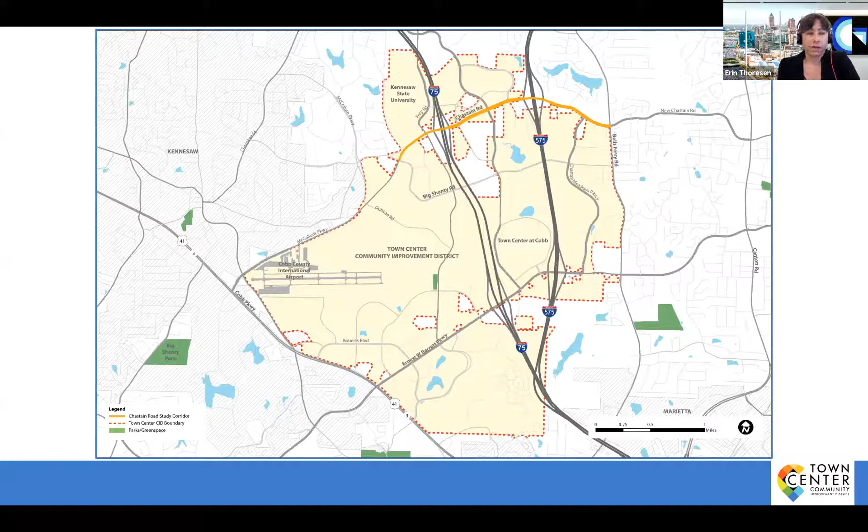The purpose of the study is to focus on walkability and creating a vibrant, walkable district, taking advantage of and leveraging smart technology for improvements to travel and mobility for all users of the corridor. We really are seeking here to link the KSU campus to Bells Ferry Road and all along Chastain Road, creating a diverse mix of office, retail, dining, and entertainment options.

So we're focused on a series of improvements that will improve conditions for biking, walking, driving, and ensuring that people feel safe and comfortable as they're doing so.

Some of the goals that we have identified throughout the course of this project, in conjunction with our stakeholder committee and based on input from community members and the Town Center CID staff, are really focused on connecting people and places. So strengthening connectivity, improving access and connections to the regional trail system, to adjacent businesses, the surrounding neighborhoods, and nearby attractions. We're also looking at improving safety and operations along the corridor.

Not just for vehicular travel, but also for people biking and walking, leveraging technology to do that, through a series of infrastructure improvements and also taking advantage of connected signal technology and other programs forthcoming to make improvements to the roadway itself.

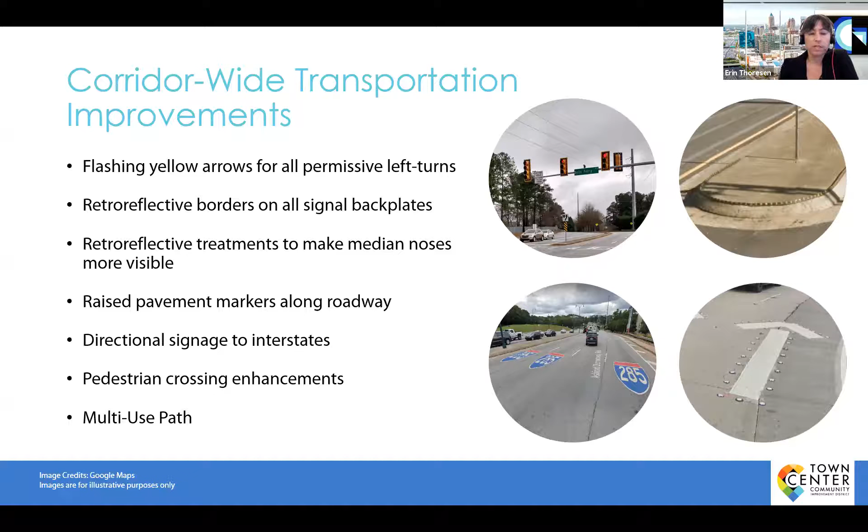Throughout the corridor, a couple of recommendations that really apply at multiple locations - at key intersections and along the main line of Chastain Road - is to implement flashing yellow arrows for permissive left turns, make sure that traffic signals have retroreflective borders on the signal backplates, improving safety by adding retroreflective treatments to the median noses and also along the roadway, as well as signage and standard pedestrian enhancements, and also development of a multi-use path.

So as you can see here, we're going to walk through a series of these, but the main thing to note is that we're proposing to repurpose the existing on-street bike lane and incorporate it into a multi-use path along both sides of Chastain Road for some segments, and one side for others. We would hold the center median in place and push out the outside curb to capture that existing bike lane and use the available public rights-of-way to create a multi-use path.

This provides a facility for people biking and walking on both sides of the road, separated from the travel lanes by the curb and a planted buffer strip, making it more comfortable for all users. The multi-use path would be bi-directional, so you can travel in either direction on either side of the road depending on your destination or origin.

This is a view of what it might look like over I-75 on the existing bridge. The multi-use path narrows a bit to fit within the existing width, but it's still able to accommodate some separation between the travel lanes and the path to make it feel more comfortable than current conditions.

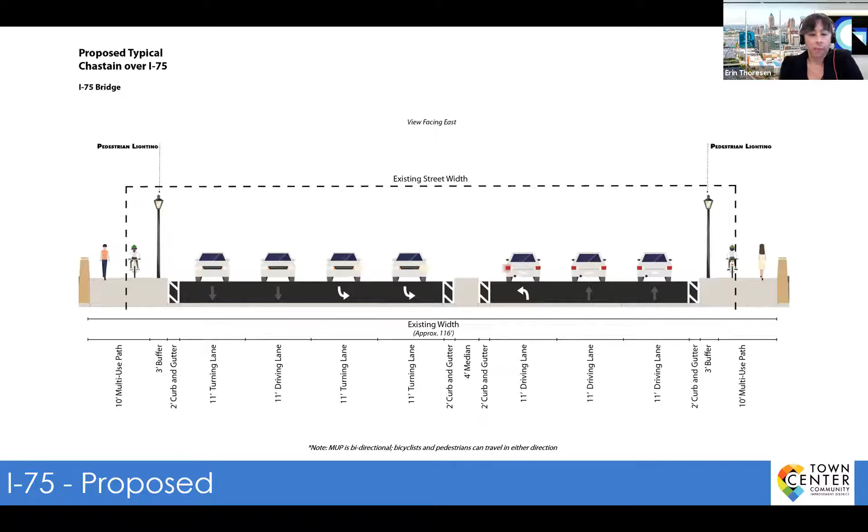Continuing eastward, we're looking at the central portion of Chastain Road. This is one of the widest segments, and the recommendation is to continue the multi-use path on both sides of the road up to the Commons at Chastain Shopping Center. You can see there's space for the planted buffer strip as well as lighting, with the multi-use path on both sides of the road.

Where the right-of-way can accommodate it, we can incorporate pedestrian amenity nodes that would provide places for people to pull off and stop, get a drink of water, check their phone, etc. We're trying to provide spaces for people to stop and rest periodically, and we could include signage for wayfinding as well.

At this point in the corridor, the multi-use path might switch to just one side of the road, along the south side of Chastain Road as you head east. This location was identified as a transition point based on connections and linkages with proposed trails, creating better connectivity to the Noonday Creek Trail and other proposed trails south of Chastain Road.

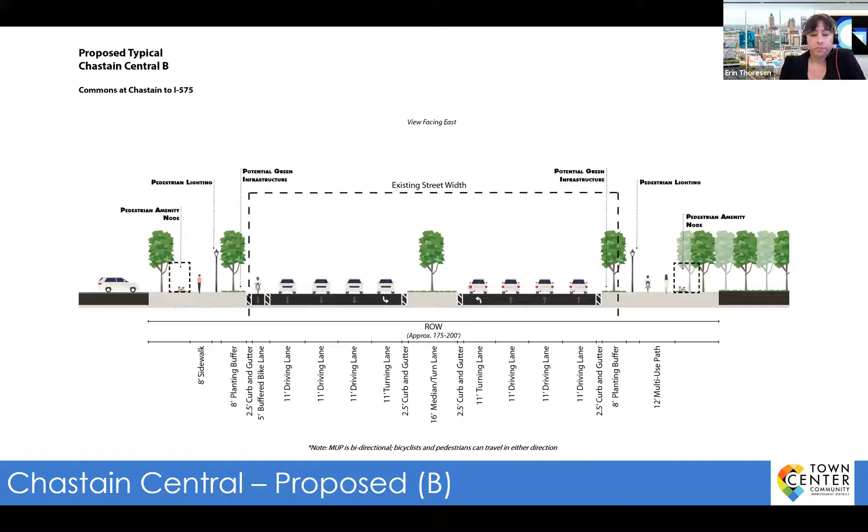Continuing eastward, we see a similar pattern with a multi-use path on the south side of the road, able to fit within the bridge over I-575, accommodating both bicycles and pedestrians. It should be noted this is just a proposed condition at this point—the exact configuration of any of these segments would depend on what improvements are advanced in the intersection improvements incorporated into these projects as they move forward.

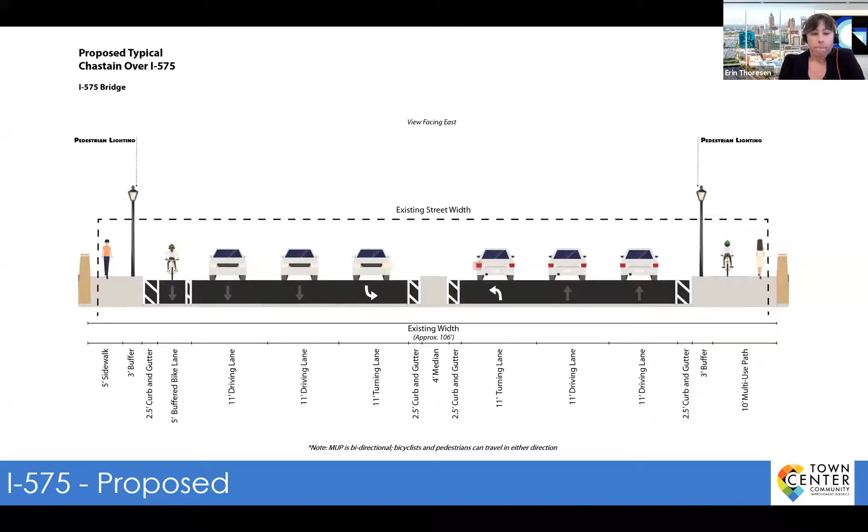In the eastern segment here on the east side of I-575, it's a very similar condition. We're proposing a buffered, separated bike lane on the north side of the road where we're not having the multi-use path, accompanied by a sidewalk, and continuing the multi-use path on the south side of the road, again with a planted buffer strip and pedestrian amenities where there's space.

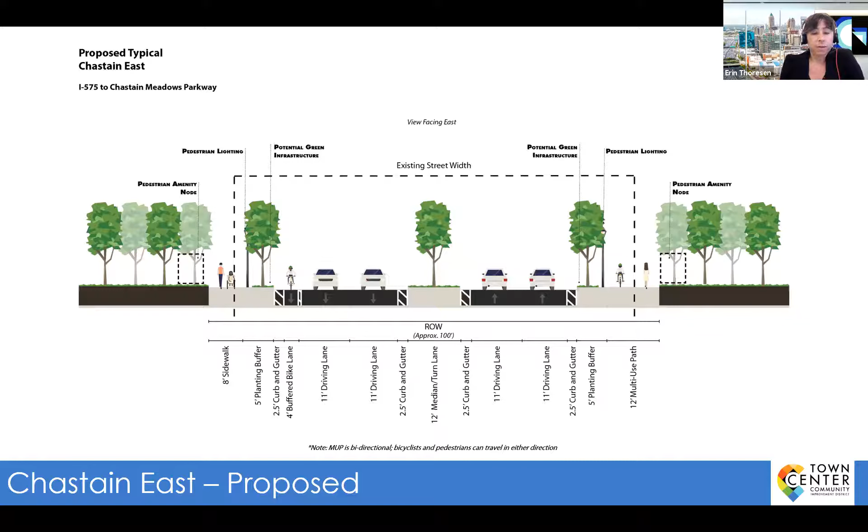Here's an aerial view of where that multi-use path is proposed. The white arrows represent some new or enhanced crossings across Chastain Road. The reason Chastain Meadows Parkway was chosen as the end point for the multi-use path is, as I said, based on connectivity.

As you can perhaps see in the dashed lines here, there are some proposed trails along Chastain Meadows Parkway and along Busbee Drive, and we have the multi-use path continuing southward in those locations. So we're really designing this to be linked up with and provide connections to those proposed other facilities.

At some point in the future, if it makes sense to revisit and consider a connection all the way to Bells Ferry Road, that's something the CID could certainly consider. Some reasons we decided to terminate at Chastain Meadows Parkway are due to topography, public rights-of-way constraints, and the limited space available in those locations. Using Chastain Meadows would also provide a direct connection down to the Noonday Creek Trail.

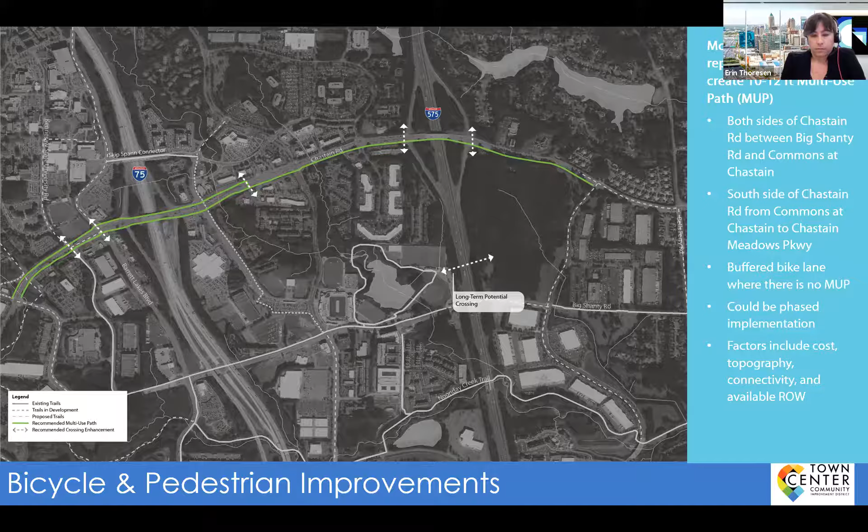As I had mentioned, we're also looking at a series of intersection improvements along the corridor. These would provide additional turn lanes, changes to signal phasing, and retrofits at some locations with a higher frequency of pedestrians crossing Chastain Road that would remove the channelized right turns. We would also look at some restricted crossing U-turns that would streamline turning movements at certain locations, eliminating left turns from side streets with downstream U-turns instead. And we'd have pedestrian facility upgrades at each of these locations, with enhancements to crosswalks as these projects move forward.

We're not going to go into the details of each of these recommendations, but there's additional material that'll be available on the CID website following today's presentation, where you can learn more about each of these improvements. But we do want to highlight just a couple for you here today.

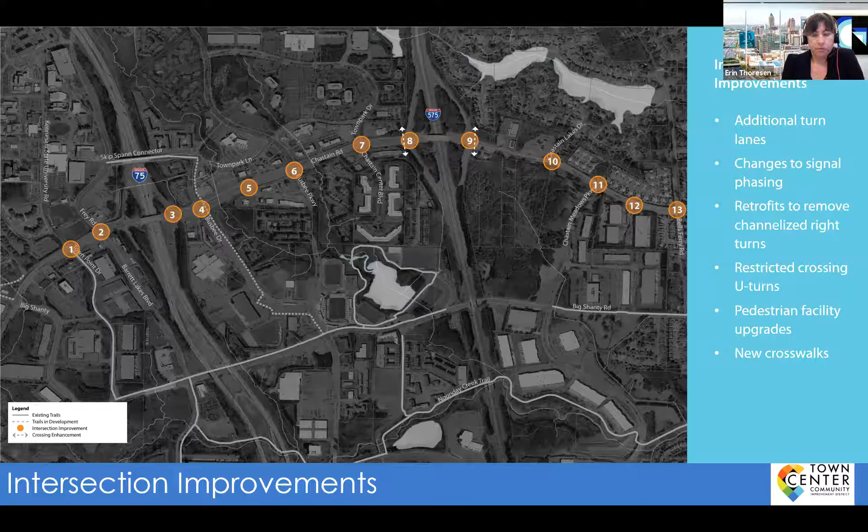One of the options we're considering is a series of improvements at the interchange with I-575. The first improvement would be an early off-ramp from southbound I-575. This would reduce traffic volume on Chastain Road in that location by diverting folks headed southbound onto this early off-ramp, which would tie into the intersection at Town Park Lane and Town Park Drive. There'd be associated intersection improvements at that location to accommodate that. By diverting those folks to the early off-ramp, you'd reduce the likelihood of weaving movements, especially for people traveling southbound on 575 who then seek to make a left turn at the next intersection.

We're also looking at providing an additional southbound lane here that would give options for people to turn left as well as right, with a center lane serving as an option lane for either turning left or right. So you'd have one dedicated left turn lane, one dedicated right turn lane, and an option lane in the middle that would allow you to turn in either direction.

Another option we're looking at for the interchange at 575 is to create a diverging diamond interchange at this location. A DDI has fewer potential conflict points than a conventional intersection, since it eliminates the need for left-turn vehicles to cross the paths of approaching through vehicles.

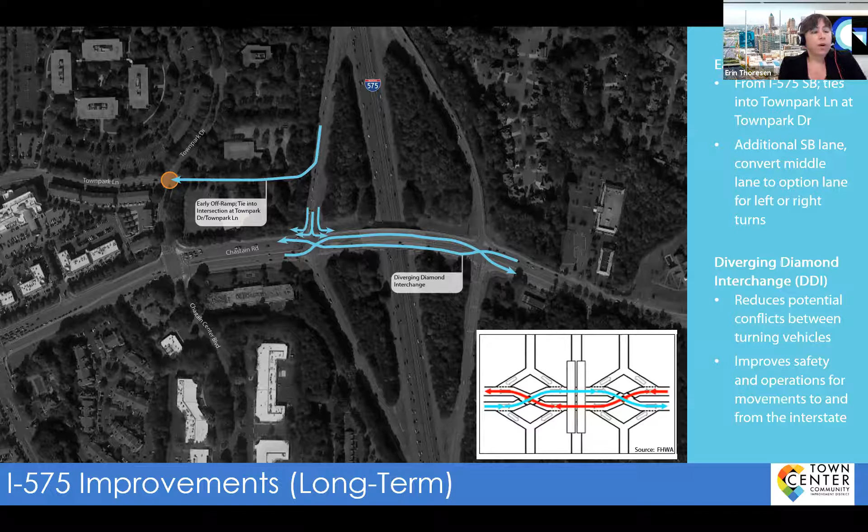Do we have other questions at this point, Alicia? Nope, no questions. Okay, we'll continue on then.

Our study, in addition to thinking about intersection improvements along Chastain Road, we're also thinking about some long-term considerations and what might help improve conditions along Chastain Road and alleviate some of the pressure it currently experiences and is likely to continue experiencing. Some of those long-term considerations include the possibility of creating a direct system-to-system interchange between I-75 and I-575 that would help take some of the pressure off of Chastain Road as well as other roads in the area that connect the two highways.

Based on our team's analysis, there are approximately 10,000 vehicles per day traveling between 75 and 575, and they're either using Chastain Road or Barrett Parkway. So that would really provide some potential relief. It's something that needs to be studied further, but it's definitely an option that we're recommending be studied in the future.

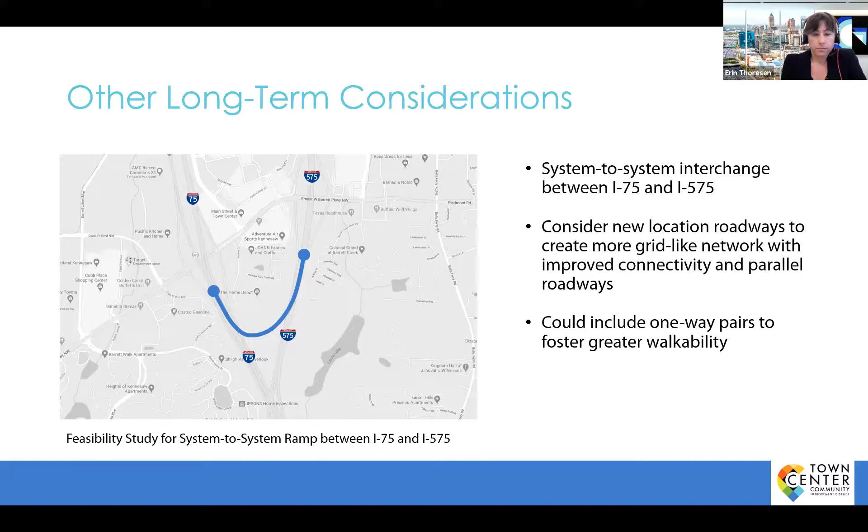So moving into the realm of technology and smart communities, we're looking at a range of different options. The team is considering ways to incorporate technology that will benefit people, whether they're biking, walking, driving, or traveling in other capacities. We looked at what technology already exists along the corridor.

Traffic signals along Chastain Road are part of Cobb County's Sydney Coordinated Adaptive Traffic System, known as SCATS, which helps the county manage real-time timing of traffic signal phases at the different intersections along the corridor. And we know that there's a regional connected vehicle program being developed and implemented by GDOT and the Atlanta Regional Commission in partnership with local governments.

Taking these factors into consideration, we wanted to see how we can best leverage that technology and what else we can recommend to complement it in order to improve operations and safety, as well as to make it easier for people to get around and help create that sense of place we're talking about creating along Chastain Road.

As I mentioned, all 13 signalized intersections along Chastain Road are going to be part of the Regional Connected Vehicle Program, that partnership between GDOT, ARC, and local governments. This program will focus on deploying dedicated short-range communications, which will target deployment of applications like emergency vehicle preemption, giving emergency vehicles priority at traffic signals, along with transit signal priority, which could help expedite transit travel along Chastain Road, or as vehicles like buses cross Chastain Road.

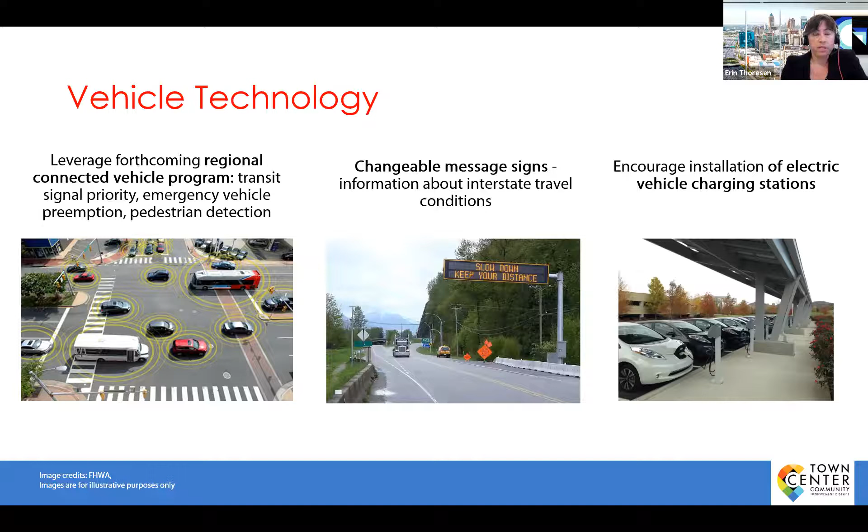In addition to vehicle technology, we're also thinking about pedestrian technology and ways it can benefit people biking or walking along the corridor. One example is the leading pedestrian interval, a Federal Highway Administration proven safety countermeasure. These help reduce the likelihood of pedestrian vehicle crashes by providing a few seconds of walk time for pedestrians before vehicles get their green signal.

What that does is put the pedestrians out into the intersection before the vehicles make their through or turning movements, so that the drivers of those cars are more likely to see the pedestrians and reduce that potential for conflict.

We're also thinking about sensors that would automatically detect pedestrians crossing side streets along Chastain Road, so that you wouldn't necessarily have to push a button to get the walk signal, as a way to again leverage technology and improve pedestrian safety.

Our team is also recommending exploring a pilot project to look at lighted crosswalks for some of those locations near KSU's campus where you have a higher likelihood of pedestrians crossing Chastain Road.

So there are several examples of these being used in other cities, and recently in the Atlanta region, the Aerotropolis Atlanta CIDs received a grant to explore something similar along Virginia Avenue.

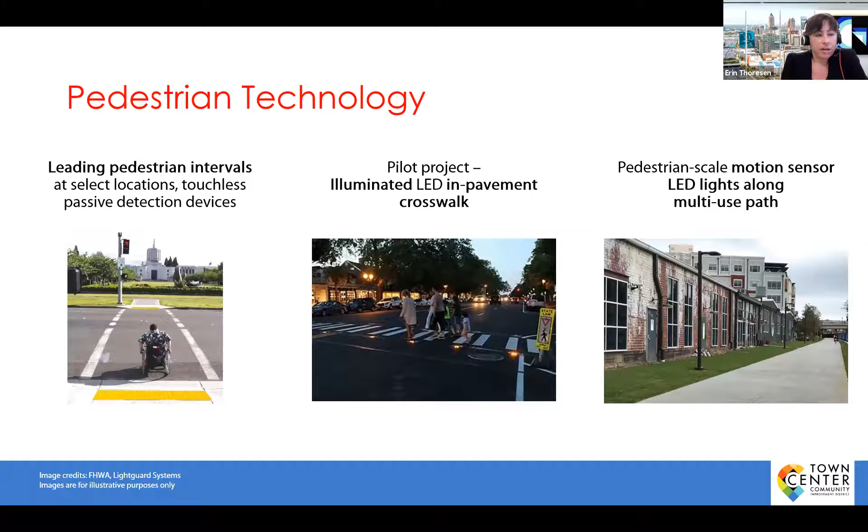So with that, we're going to continue on. We have a couple more topics to cover, and then we'll pause for some questions as we get through the next few topics. I'm going to turn it over to my colleague, Erin Hathaway, to talk about urban design and placemaking. Thanks, Erin. So we're going to walk through a series of recommendations related to public space and development that prioritizes pedestrians and active entertainment uses, really to strengthen this corridor as a destination.

It aligns with the goals that we talked about at the beginning. These include short and long-term shared public open space, amenities along the corridor to support multi-mobility like streetscapes, as well as making sure infill supports the goals of this study. Next slide, please.

So this is just a quick study to showcase what the streetscape could look like along the Chastain corridor. Now, we know that the CID has their own streetscape guidelines, and so we're incorporating those into how we see Chastain with our multi-use path. Here is just an example of how that would look.

We have the white band in the middle, which is where the multi-use path would run. The orange line is where the curb is bumped out. As explained earlier, we're basically pushing the bicycle lane up behind the curb, which gets us more space behind the curb. We've suggested and recommended that stormwater infrastructure be installed as a buffer, so that water from the street can run off into a sustainable solution for filtering that stormwater before it goes into the system.

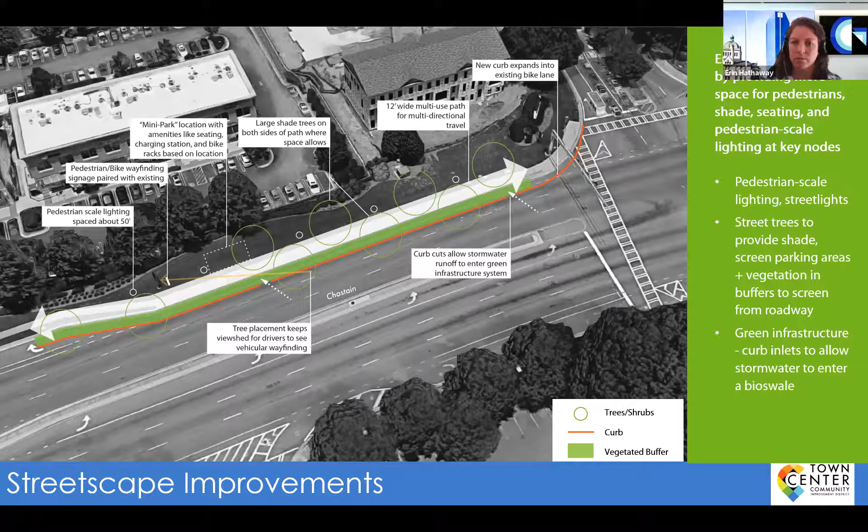These would not be ones that happen regularly, but they would be in very strategic, specific locations that could provide information to pedestrians exploring the corridor, about where live events might be happening, or letting them take advantage of different businesses having specials and whatnot. So those would be very strategic locations for the technology kiosks. Next slide, please.

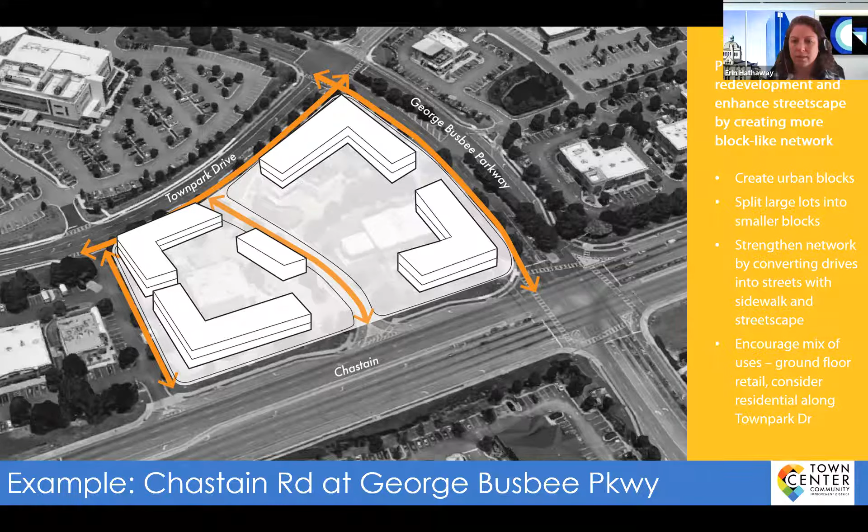This is really about enhancing the Chastain and the street frontages—pulling those buildings closer to the streets and pushing the parking lot to the middle of the sites. This provides pedestrian connections into the development areas.

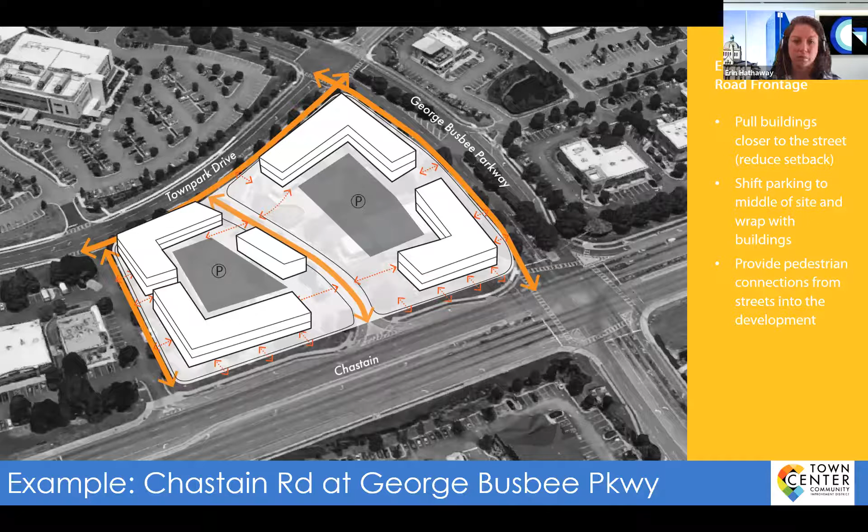Next slide. And again, we talked about carving out public space for these development sites, whether it be mini parks or, in some cases, common shared outdoor dining areas. They could also include different amenities like bike parking in those spots as well.

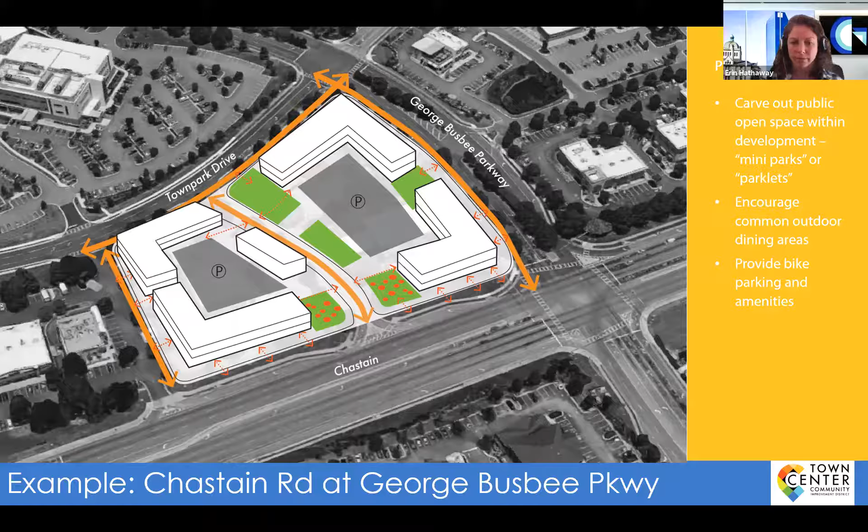Next slide, please. And again, the last one is really about strengthening placemaking and pedestrian activity—as we said before, pushing out that curb and creating bike and pedestrian space along the corridor.

Again, this would be that sort of really big streetscape moment where we would plant trees and install green infrastructure. Designating the corridor as a pedestrian lighting district would allow for pedestrian scale lighting and pedestrian scale wayfinding.

So really, what we're trying to show is just how a development could be framed in much more of a pedestrian friendly way, encouraging active uses on the first floor of the buildings and carving out spaces for shared pedestrian and public spaces.

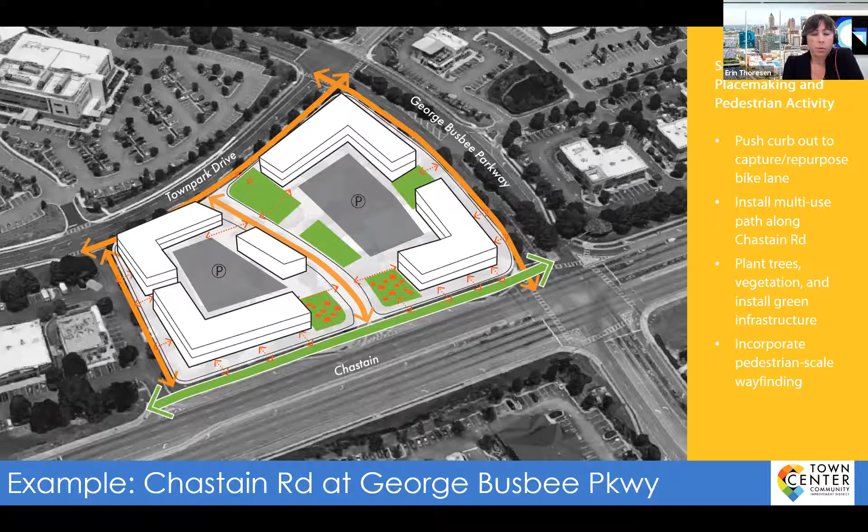I think we have a couple more questions, but I want to be mindful of the time. So what I'd like to do is move to a quick interactive question to get a pulse on what people are excited about or think has the most potential to benefit the corridor and move things forward. Then we can take a couple more questions—we still have a few minutes left. We'll also talk briefly about our next steps as we aim to wrap up the study.

For anyone with a smartphone or tablet available, go to www.menti.com and enter the code 6331020—you should see that at the top of your screen. It will prompt you to enter ideas you're most excited about. So what are the things you think will have a positive impact on the future of Chastain Road? You can enter multiple responses too.

So we're seeing improved safety for pedestrians and bikers, safer crosswalks, campus kiosk, walking paths, smart technology, more foot traffic, some excitement about the DDI, charging stations and Wi-Fi. We've got 9 or 10 responses so far.